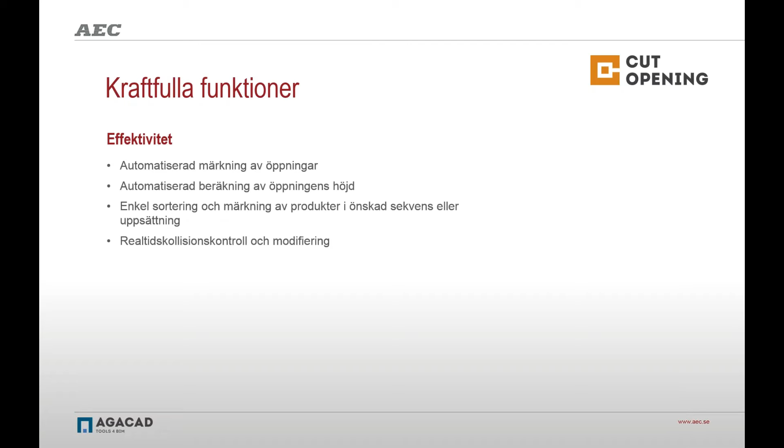Thank you, Roger. Thank you. I'm trying to make me a presenter. Could you see my screen? Yes, we can. Yes, very nice.

So hello, my name is Jokubas Vaishvila. I'm a BIM application engineer and MEP engineer here in AGACAD, and today we will speak about Cut Opening software for Revit. And first of all, I want to introduce Cut Opening a little bit.

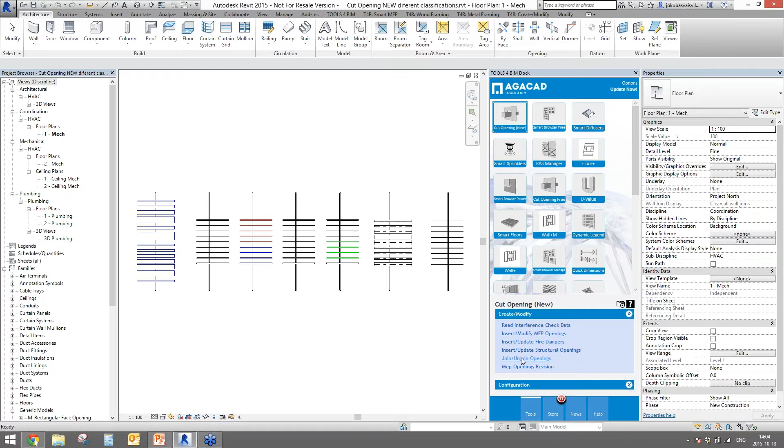So Cut Opening is a tool that can create openings all around MEP line-based elements, as Roger described just before. Our Cut Opening is placed in the Tools for BIM dock, and it has a lot of different features like insert openings, insert fire dampers, insert structural openings, and so on. So I will start from openings for different systems.

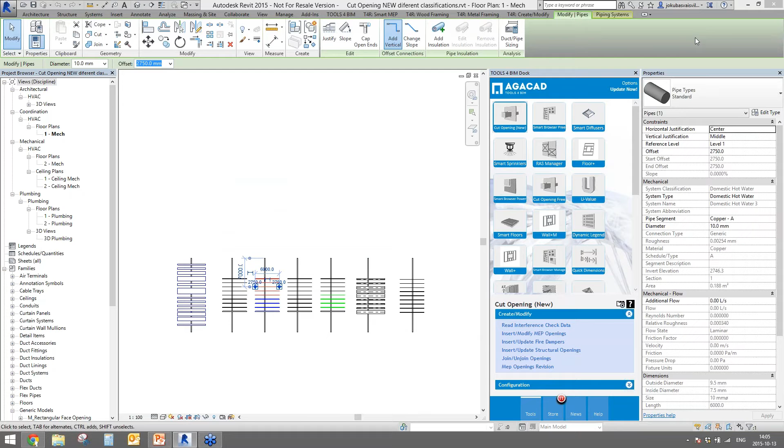I have different ducts here. I have different pipe types and pipe system classifications here, and I want to speak about how we should work with this in Revit. So at the very beginning, to start the work with Cut Opening, we have to use Autodesk Revit tools like interference check, and we have to run interference check between different categories.

So in my case, I have different categories for ducts, pipes, cable trays, and conduits over there. On one side I should use MEP objects like cable trays, conduits, ducts, and pipes, and on the other side I have to pick something structural. Our solution supports cable trays, conduits, ducts, and pipes, as well as walls, floors, ceilings, roofs, beams, and columns. So on the structural side you can choose those structural elements as I listed before.

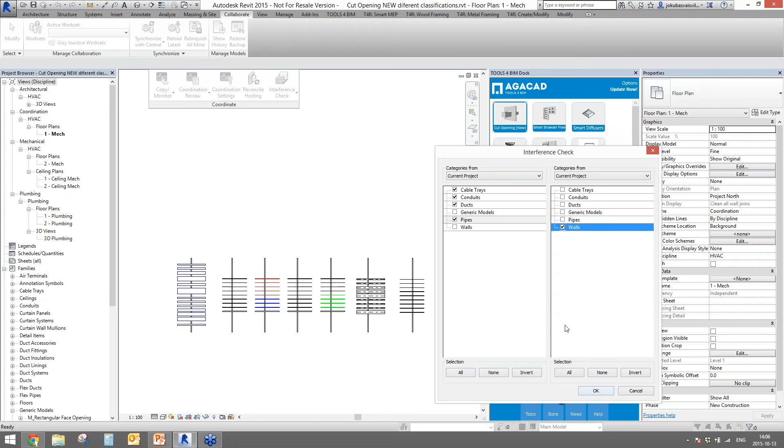And after you run this interference check and you have all the clashing points over there, you can export everything to an external HTML file by the name you wish, and I'm saving that. And the next step, what you should do, is to make your own configuration.

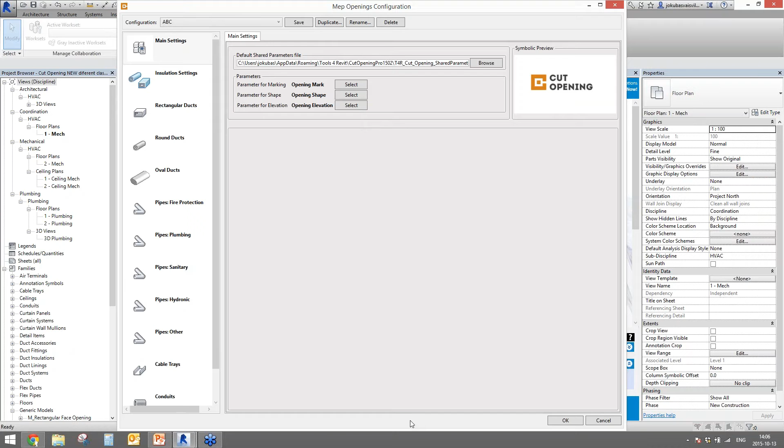So I will speak a little bit about the configurations inside of Cut Opening. So I'm clicking on MEP Openings Configurations, and I get the dialog with all needed configurations, as I told you before. So as you can see, for example, I will open pipes.

On the left side we have different systems and different types of MEP line-based elements like rectangular, round, and oval ducts, like fire protection, plumbing, sanitary, hydronic, or other pipes, and we have cable trays and conduits. So for each of these different system classifications or different types of elements, we can add different configurations for openings.

This is a new version of Cut Opening, so we have introduced a very nice feature that you can add different cut offsets, different additional top or additional bottom offsets for different ranges of pipes. For example, if you need to place the offset of 200 millimeters for pipes that are from 0 to 25, you can do that. If you need to do that for the pipe from 25 to 50, you can do that. You can write your own cut offset.

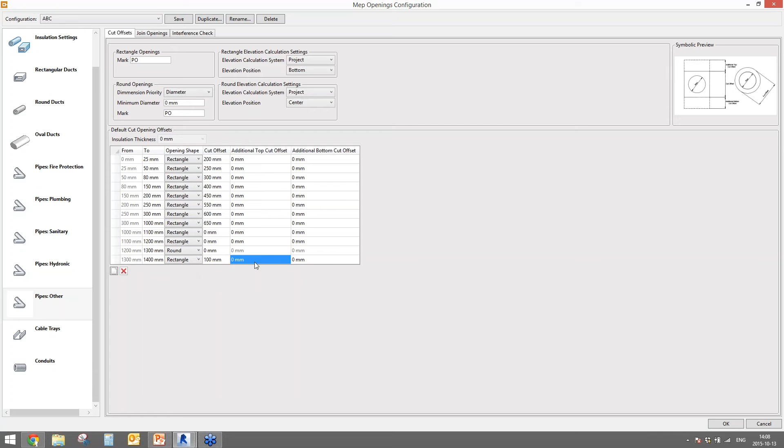Anytime you can create your own pipe types, pipe ranges from, for example, 1.3 to 1.4, and you can add your own cut offsets as well. You can change the opening shape, and you can add additional top or bottom cut offsets if it's needed. For example, that is common with the cable trays. When you need to lay the cables from the top side of the cable tray, you have to cut a bigger opening in such a case. So in this case we do not have such.

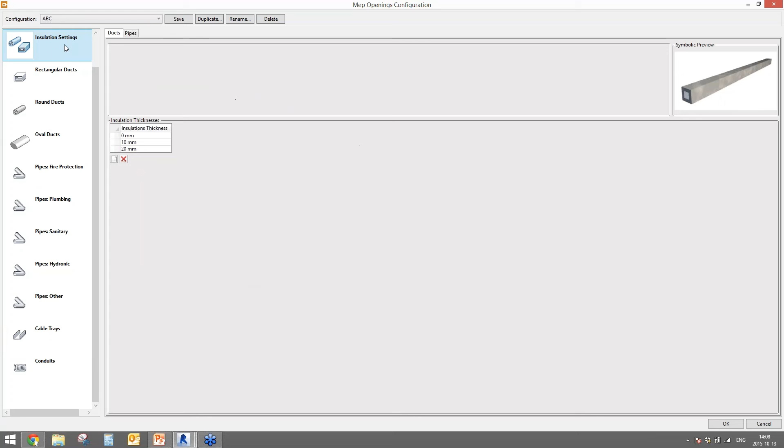As well, you can do these things for different insulations of ducts or of pipes. For example, if you have something like fire protection walls and you have to create bigger openings for such insulations, you can go and you can change that, and you can create your own specific new things inside of here.

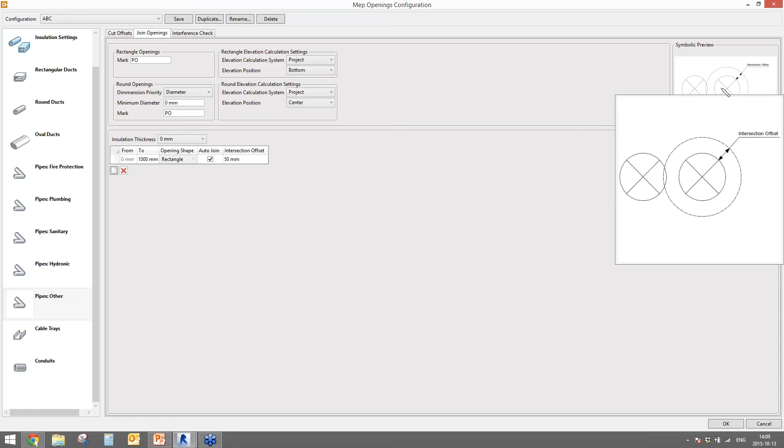As well, we have auto joining functionality that you can find here. So our solution could auto join the openings into one bigger opening if the distance is set to this one, and it will automatically create a rectangular opening. It doesn't matter if they were round or rectangular before. As well, you can add your own ranges here, as the example I showed to you before.

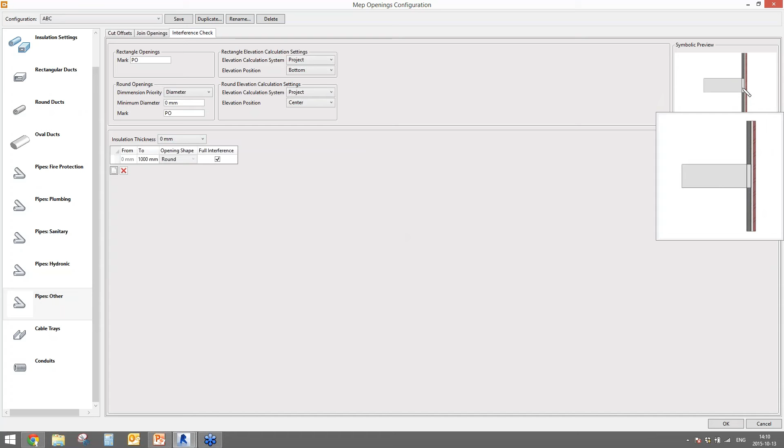And we have a very nice feature for ducts. Maybe it's best described with the ducts. When you have a wall-mounted diffuser, and your duct does not cross over the wall but just reaches the wall, like in this picture, we can cut the opening, or we can not cut that opening, so that depends on if we require full interference or if we do not.

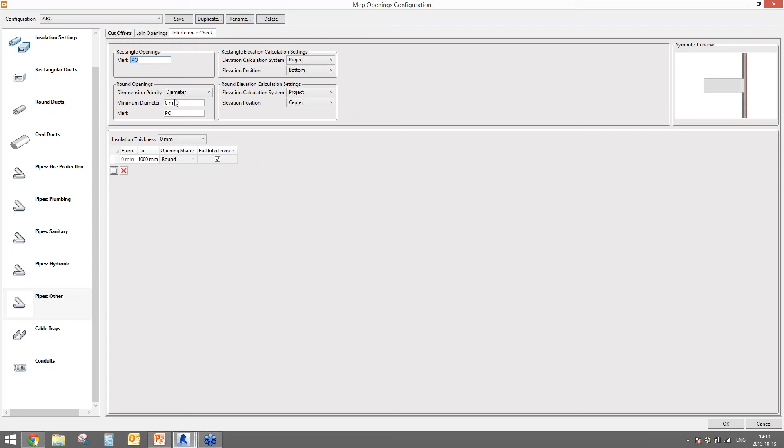So after you set all the configurations, you can set some marking things, like you can mark the rectangular opening, you can mark the round opening by your new marks. For example, in my case, if I have pipe other, I have PO, where P stands for pipe and O stands for other. If I have pipe hydronic, I have pipe and hydronic here.

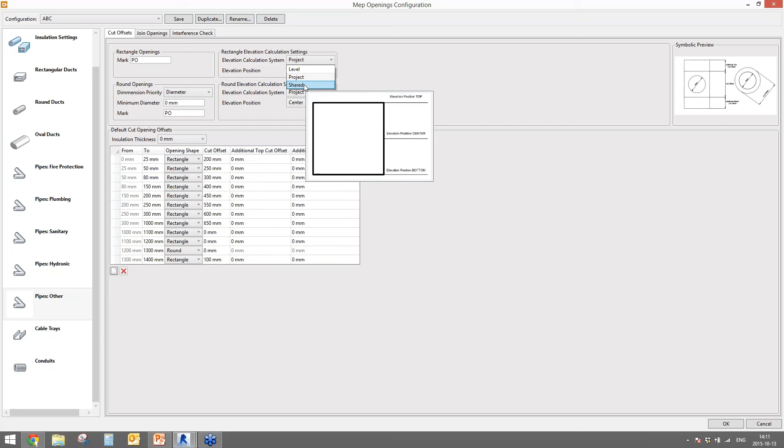As well, we can calculate the elevation of each of these openings by different systems of calculation. So we can calculate the elevation of our opening from the level that is above the opening. As well, we can calculate the opening elevation from the zero project point, or from the global 0 point, that stands for the shared elevation calculation system. As well, you can see that we have the descriptions everywhere. We can calculate the elevation from the bottom of the opening, from the center of the opening, or from the top.

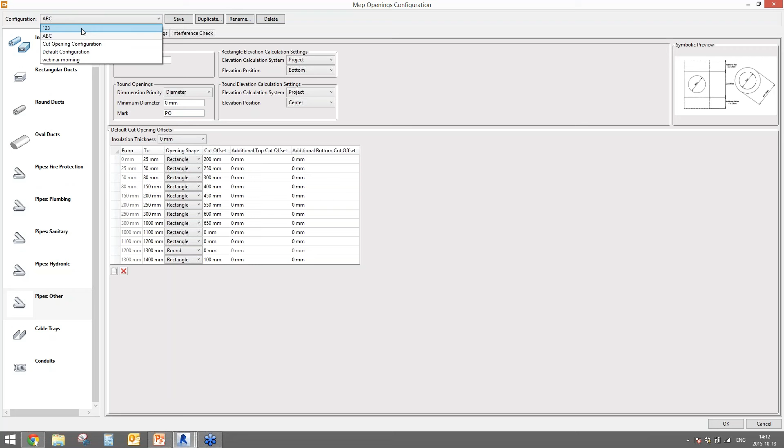So you have to do these steps once. You have to click, you have to write the markings, you have to define all the configurations here, and after this you can save everything as your new configurations, and you can share that in your company with your colleagues, and all your colleagues will have the same configuration file afterwards. So after everything is set, we have to click OK, and now we can go and work further. So as you remember, we ran the interference check before, and now I'm going to read that interference check data using Cut Opening software from Tools for BIM dot.

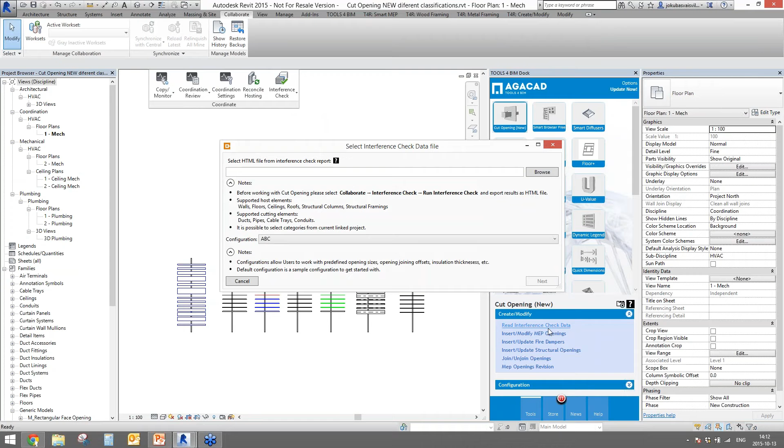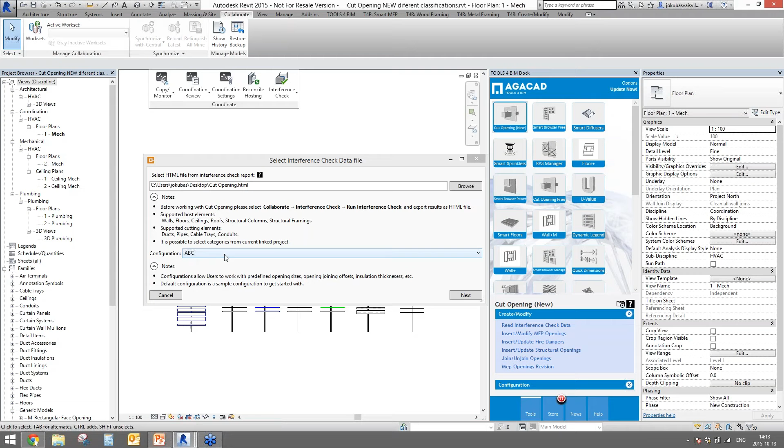So here I have a really nice dialog where I will browse for that HTML file as it's written here. I'm browsing it here, I'm finding that cut opening HTML file, and here I have to choose my configuration according to which I will place the openings to my project.

So as you can see, we do not have any misunderstandings right now, but if I change that to the default configurations, for example, you will see that we are missing some functionality, or we have some bad points inside of this clash report. So the solution is saying that we are missing opening configuration for conduit sizes that is 103 millimeters diameter. So I can add that.

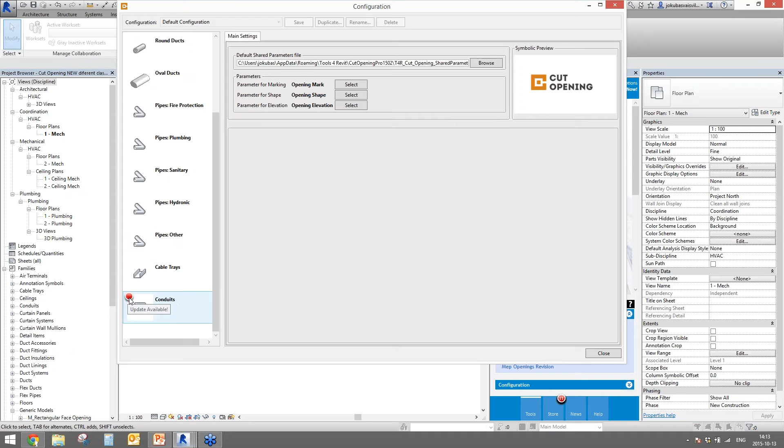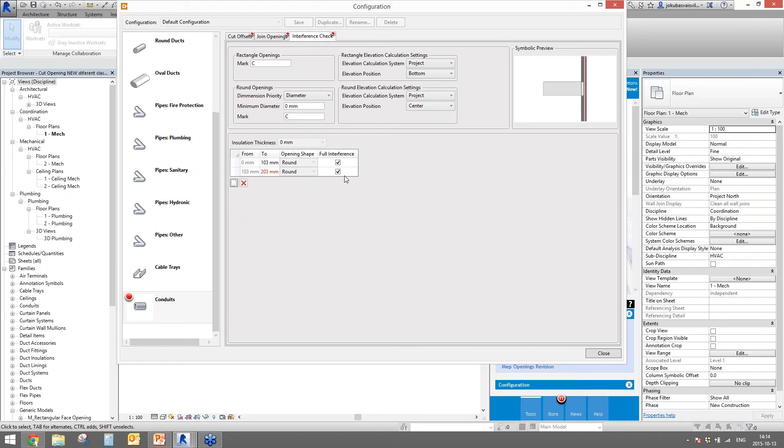And afterwards I can review the configuration, and you will see that our cut opening became a little bit smarter, so it has the intellect. If you follow the red bubbles, you will see that our cut opening found that we are missing such configuration, and we can add new configurations, new cut offsets, new opening shapes, additional top and bottom offsets, joining distances, and interference check requirements for such sizes.

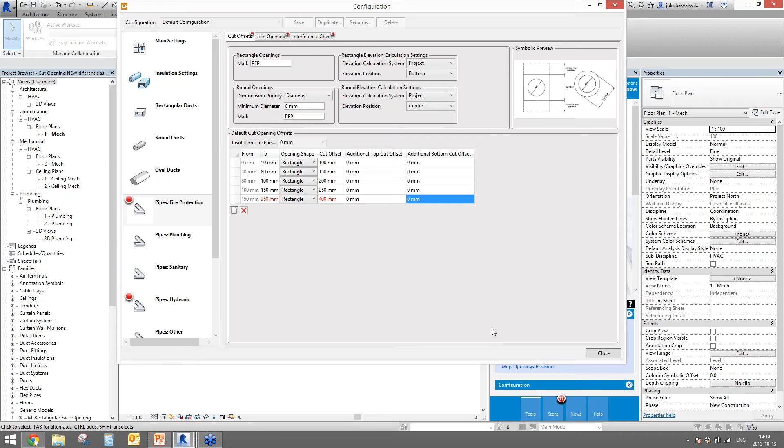So after this, everything will be written inside of that configuration. So I can add all my needed missing configurations, and I can review them again. And as you can see, we have fire protection, and we have added new ranges for that.

So after this I can go with two different scenarios. I have the scenario when I click next, and only not excluded elements will be processed. That means that these elements shown here by the IDs wouldn't be processed, so the openings wouldn't be inserted for these MEP line-based elements. But if I go with the skip button, all not excluded and excluded elements by configurations will be done. So let's try to do that by two methods. Firstly, I will go with next.

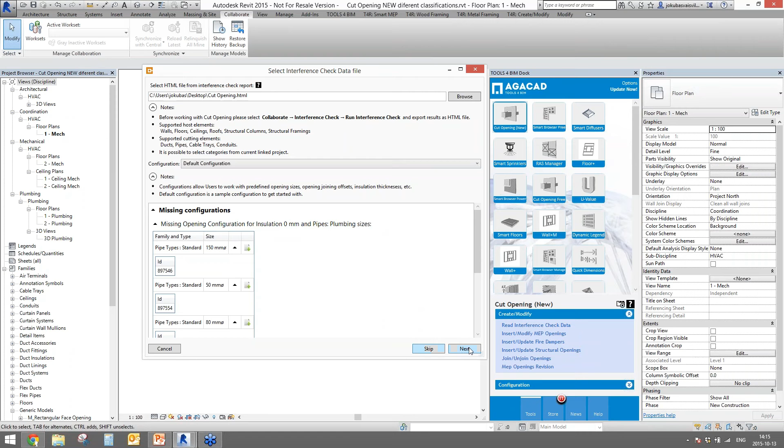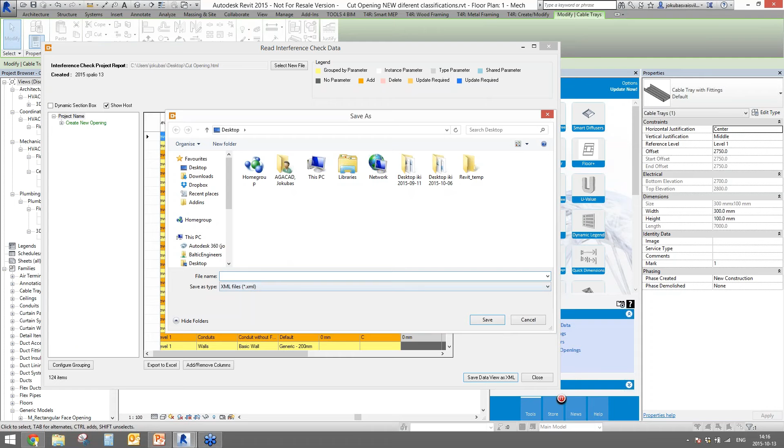And as you can see, we have a dialog where we have all the markings, we have insulation thicknesses, we have additional top bottom offsets, we have opening shapes, and so on. All the information is written inside here. If it's needed, we can use configure grouping to group our elements by our needed grouping types. And after this I have to save data as XML file, and I'm calling it XML next. I'm saving that.

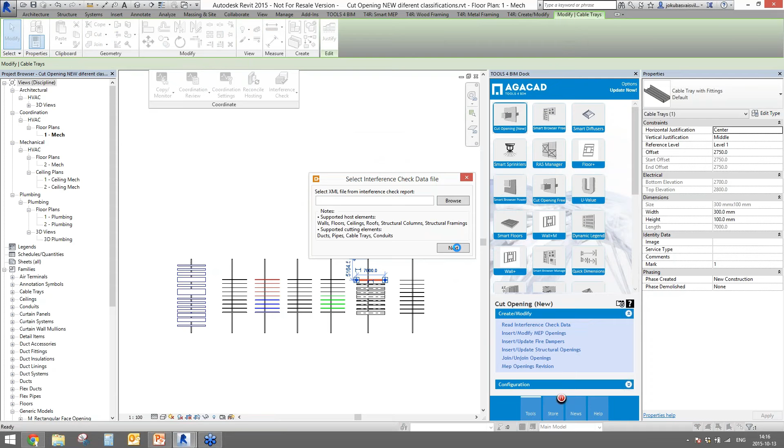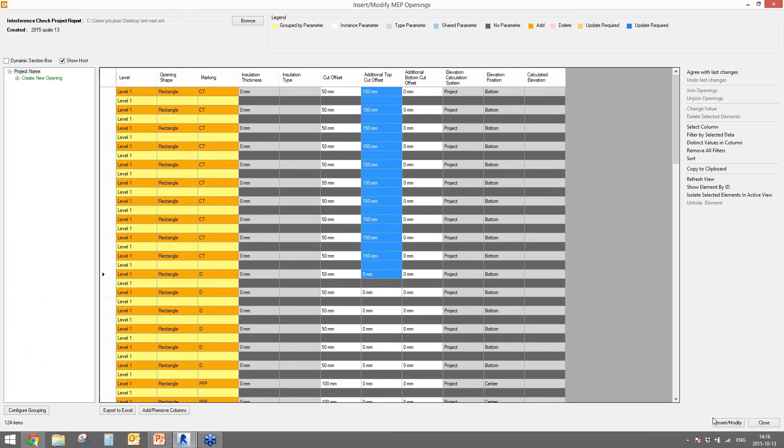Yes, and I'm going to insert openings by that XML next file. So I have a lot of openings with the same cut offsets, the same top and bottom offsets, and so on. So I can share that HTML file that I just saved with my colleague through email or something like that. It doesn't matter. And my colleague, for example, a structural engineer, could insert those openings into the model instead of me.

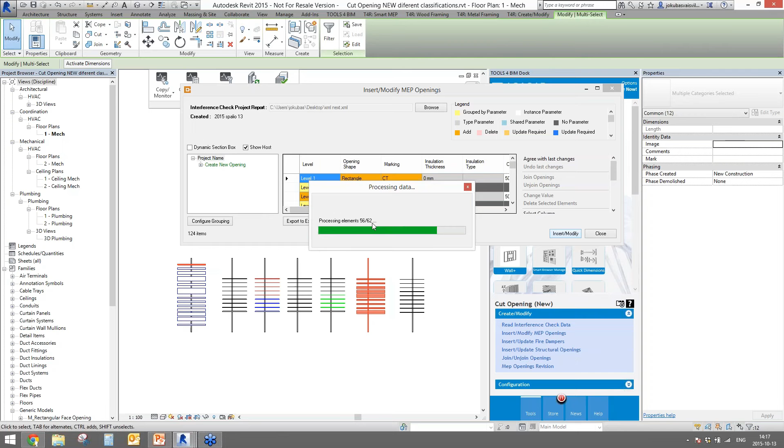So after he gets that information, he will know all the offsets and all the configurations that were set before. And I will try to insert openings, and you will see that 62 openings are inserting now. Let's go to the 3D view, and you will see that we have openings over there. But we do not have any openings for domestic cold water right now. And all these openings that are distributed have the information who inserted the opening, what the insertion configurations were, and what the insertion date was.

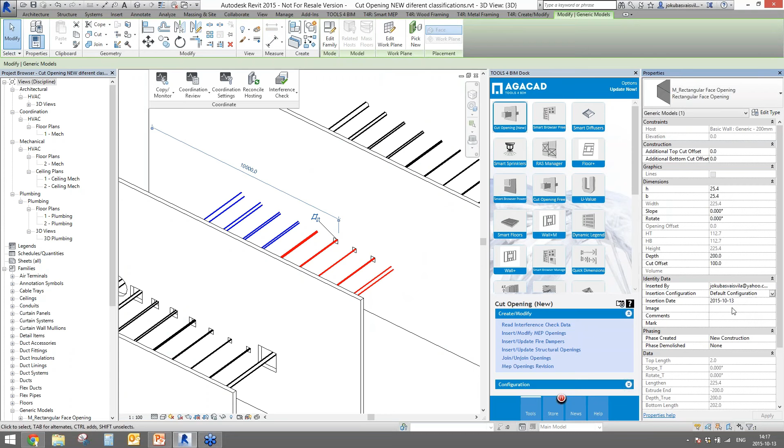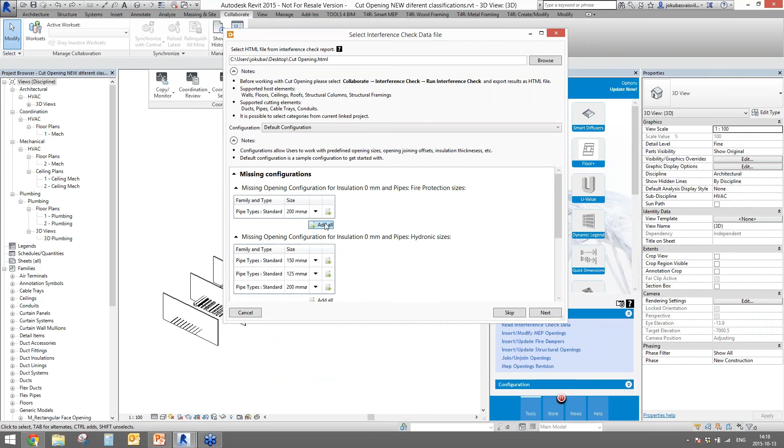And if I turn off and read again the interference check data from the same file, I will show you what will be done. I will add this one, this one, this one, and this is missing, and I will use the skip button, and I will save XML as XML skip. So it will insert openings for all MEP line-based elements.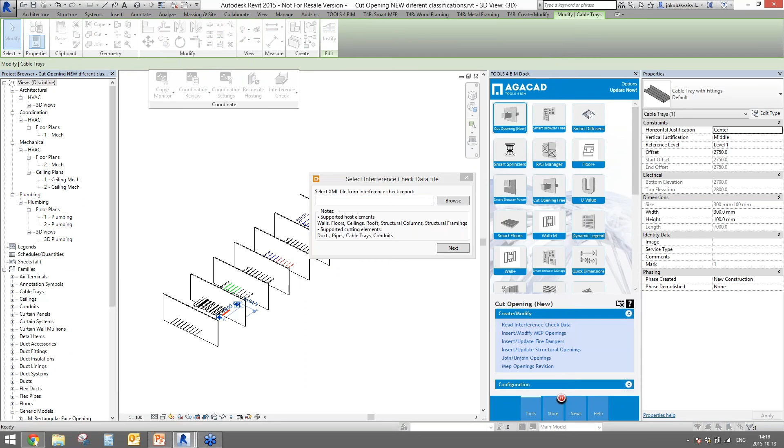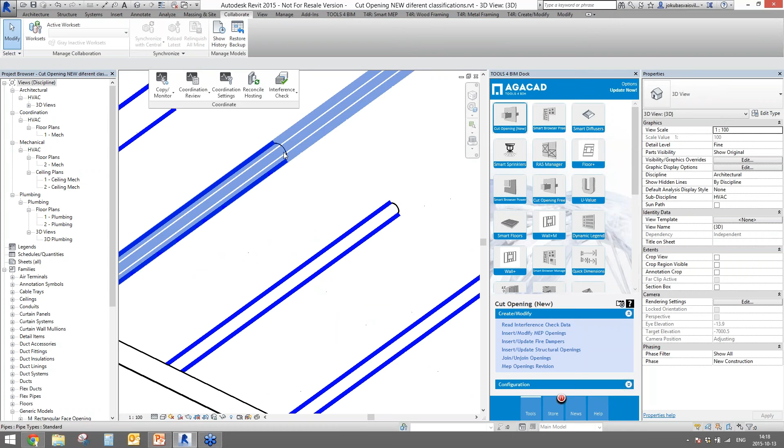So I'm inserting, I'm browsing the skip file, I'm clicking next, and now I'm inserting. So instead of 62 openings, we will insert 68. That means we are inserting more openings. And as you can see, those elements have no configurations, but they are inserted.

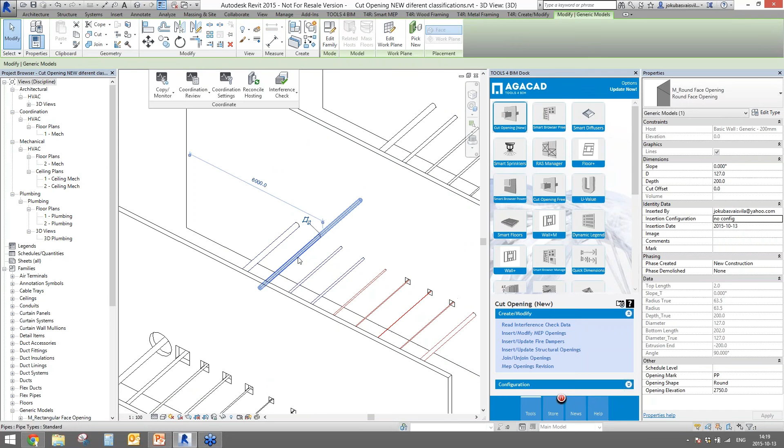So that's the difference between next and skip, and you can work with the configurations or without them if you need just opening shape and opening size dependent on the pipe or on the duct, and so on. So that is how the cut opening is working, and I just want to mention several things.

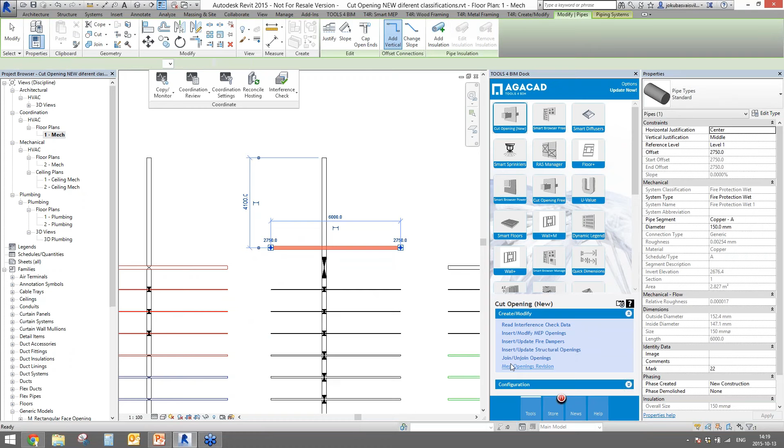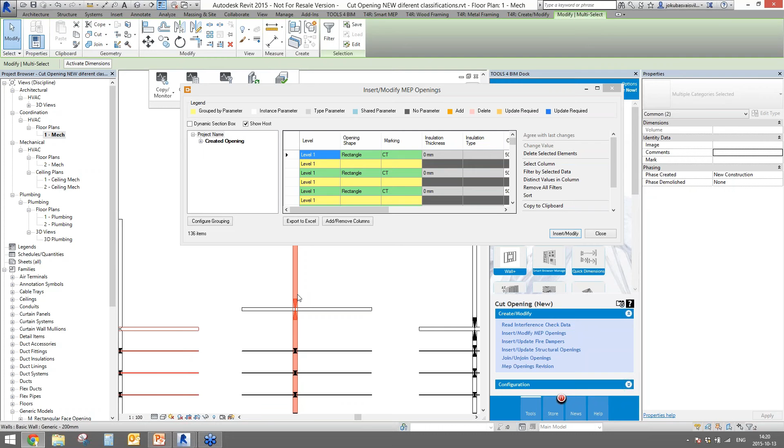If we move our elements, the cut opening will notice that, and if you go to Mep Openings Revision, you will see the change. You will see the changed position elements, and if I take those, you can see that the opening and the host were changed. I can modify that, and you can see that my opening pops back to the pipe or to the duct, it doesn't matter. Oh, you have to refresh this one. If the MEP object is moved, you will always know that you have to modify or update that.

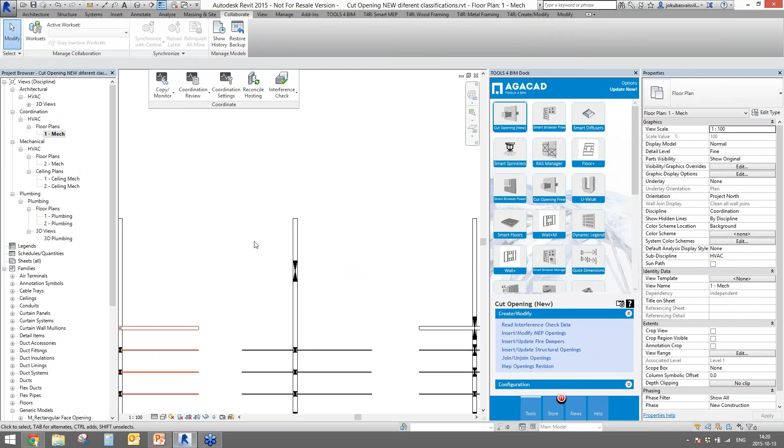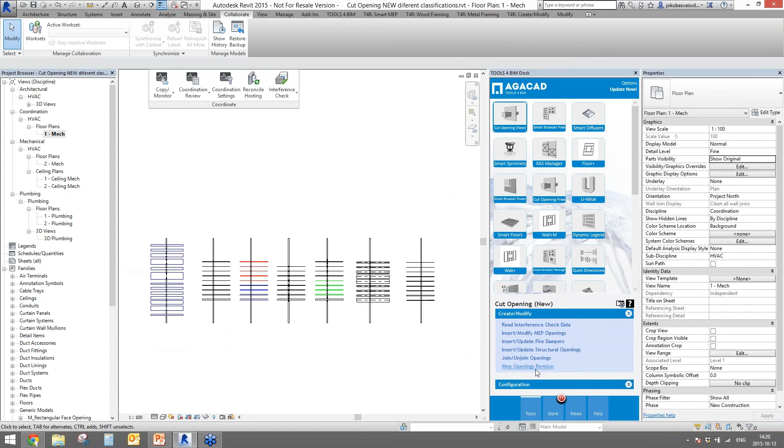If you delete an MEP object as well, you will get the same message that we have deleted elements, and we can modify that, and the opening will disappear from your project immediately. So if you make any changes to the model, you will always know that some changes have been made for those openings. As well, you can do something manually. For example, for this opening, you can add additional top offset. As you can see, the opening can still be modified by hand, and you can do whatever you want here.

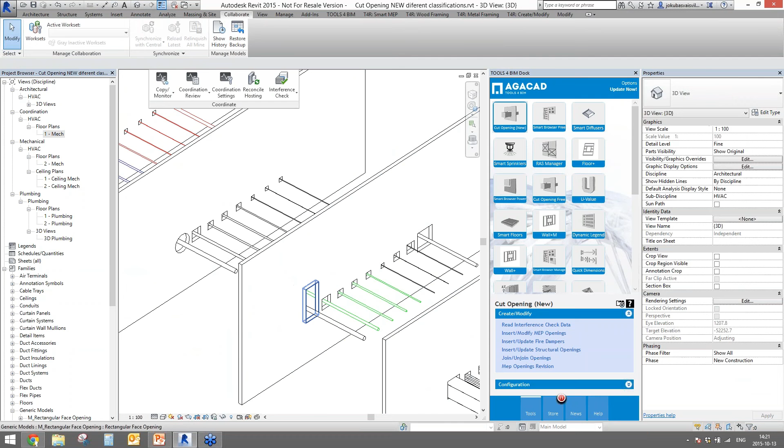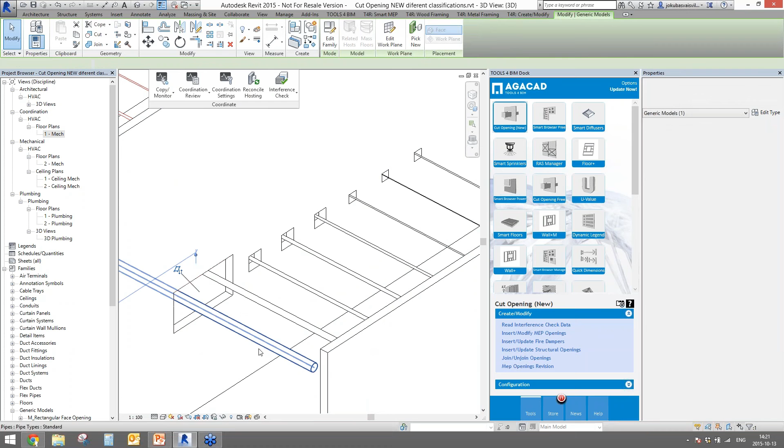As well, you can use our functionality to auto join the openings. And as you can see, they auto-join the openings. Or those two. Okay, let's try the round and rectangular one. Those two, I will try to join the openings, as you can see, and I can unjoin them if it's needed, and they will remain the same as they were before. So that is all for the openings, and I want to move further and speak a little bit about fire dampers.

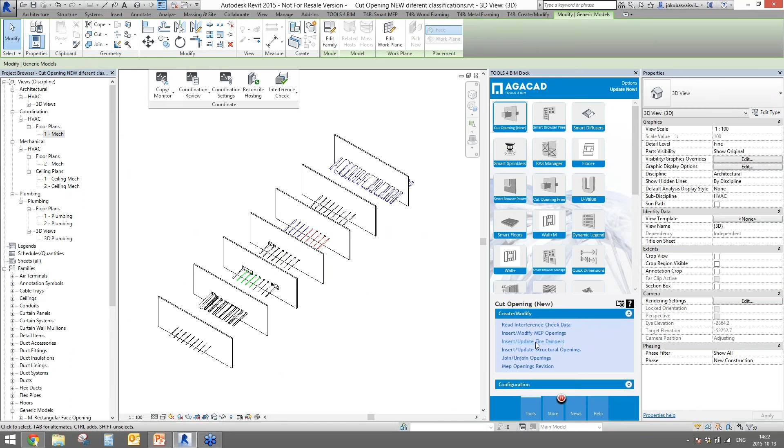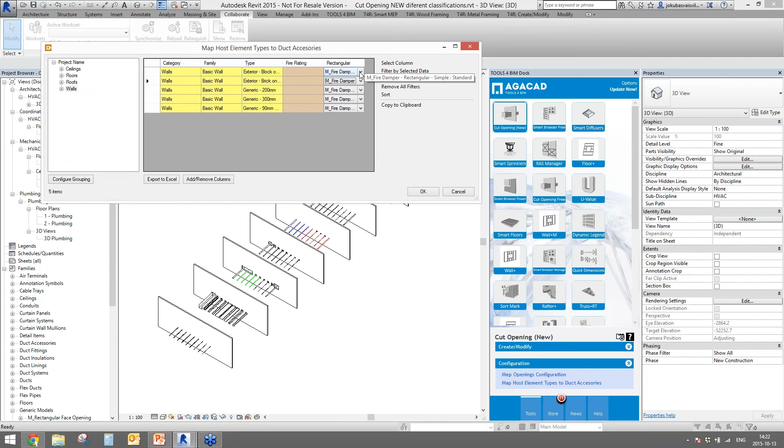So we have the possibility to insert or update fire dampers in the Revit model for ducts where they clash with walls, roofs, floors, or ceilings. So we can go to map openings, map host element type to the duct accessories, and as you can see, we have walls and types of those walls. If we write some fire rating inside the walls, we will find that over there, and we are able to choose from our families that stand for fire dampers here. And after we map everything, we can go back and insert or update fire dampers into our project.

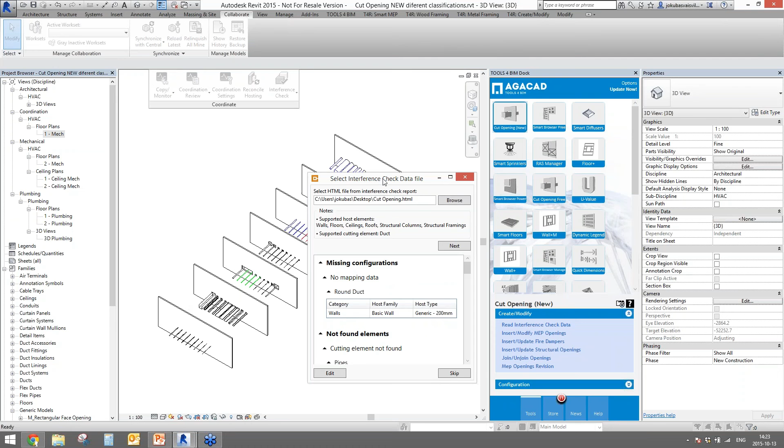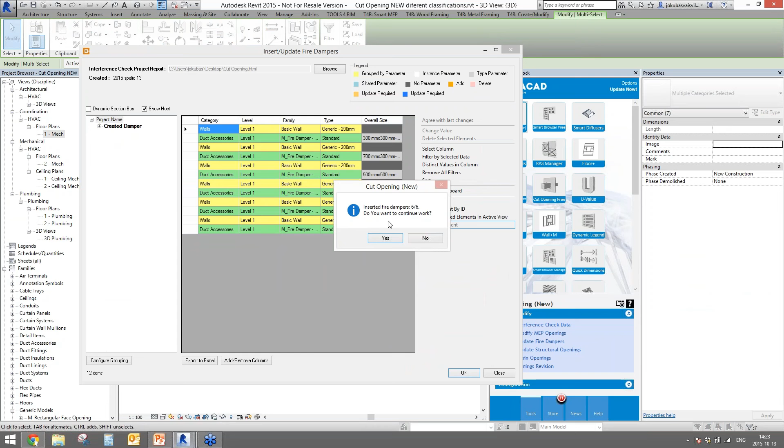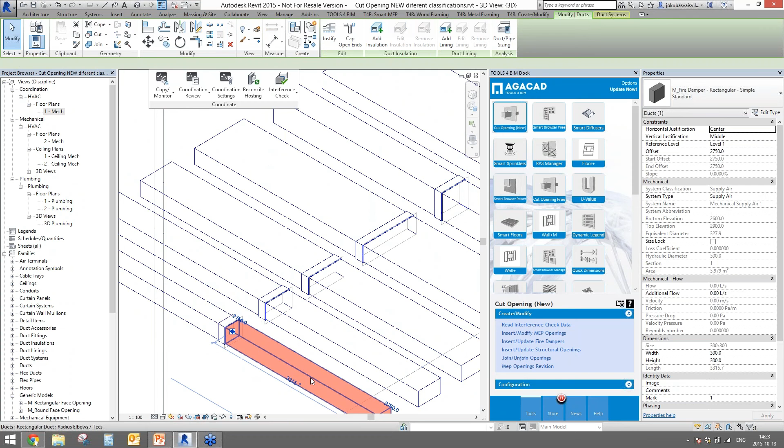So I will use the same HTML file. I will get a lot of notifications because I have pipes and walls and so on. So I will go with next, and I have only several ducts and one wall to proceed with the fire dampers. After I click OK, you will see that I have distributed elements. Let's change the discipline to mechanical, for example, and as you can see, we have distributed fire dampers in places where the duct clashes with the wall, and as well we can create the opening all around in such a case. So this is how insert fire dampers works.

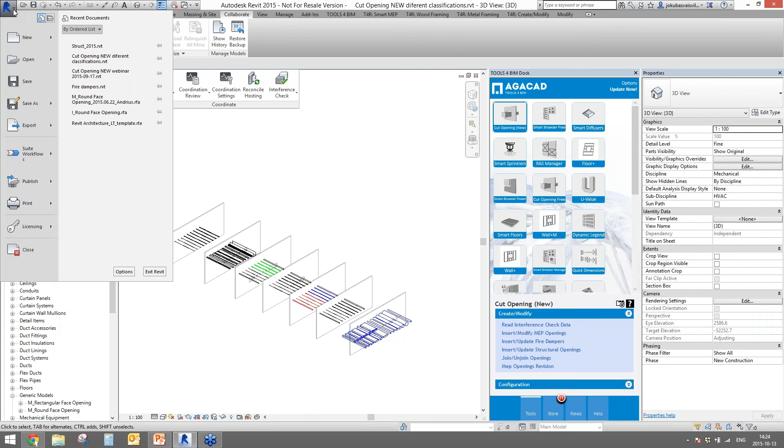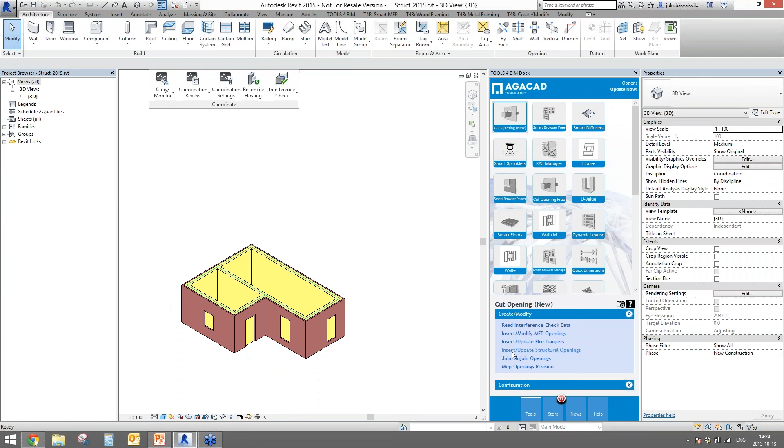As well, I want to speak a little bit about structural openings. We had several clients that had such problems in Revit. While you have the linked architectural model with openings for windows and doors, we can transfer the opening shape and geometry, the height and width, to the structural elements like basic generic walls. So we have the possibility to insert or update structural openings, and as you can see, it found all the openings.

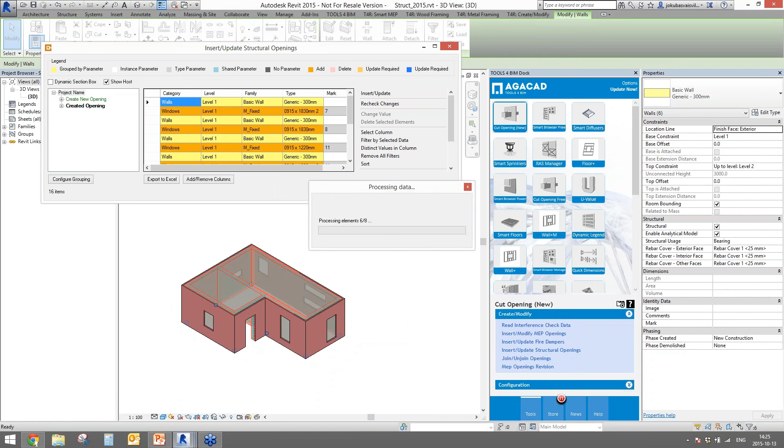And after I click OK, I will work firstly with the doors. It inserted an opening for a door. Yes, I want to continue work, and I will go with the windows. No, I don't want. As you can see, we have really nice openings in such a case where they have a linked architectural model, in the regular structural objects.

So if you want to try the cut opening solution, you can visit our web page, www.aga-cad.com, and you have to scroll a little bit down, and we have one shortcut to all tools that is named Tools 4 BIM Dock. And Tools 4 BIM Dock is this toolbar where you can find all the tools for cut opening from AGACAD, and you have to click on Revit 2016 download.

After the download, we have to click on it, run that. It is installing now. I am accepting that, so that will take just several seconds, I hope so, and we will get the right information. So here in the Tools 4 BIM Dock, we can find the store where all our tools are placed, so you can try all of them for 14 days freely.

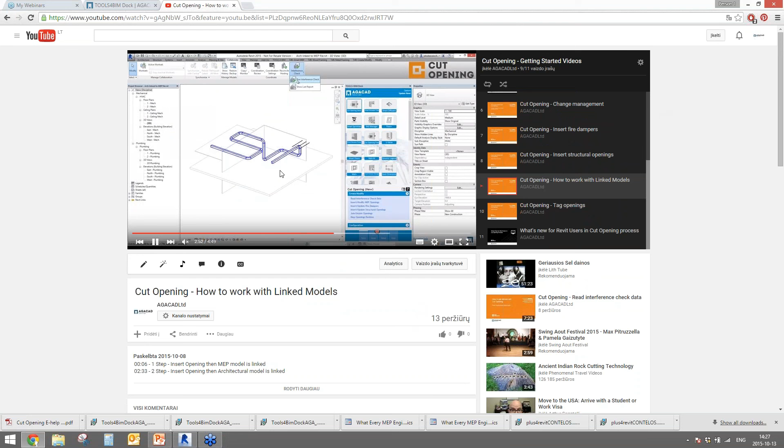As well, you can find all news over there, all tips and tricks for each of the tools, and so on. As well, if you go to the cut opening, you can find that we have e-help of the technical documentation. Just a second. As well, we have getting started video material. So if I click on it, you will see that we have a lot of video material, how to work with linked files, and so on. So you can work with the linked files as well, with cut openings as well, the IFC, and so on.

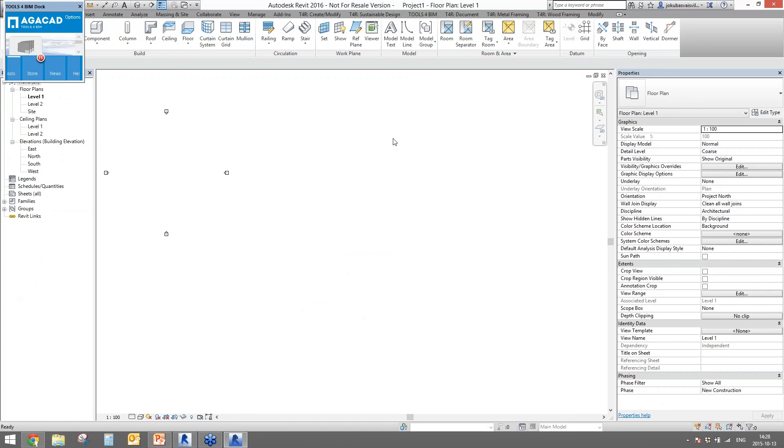So after we downloaded everything, we can go to Autodesk Revit 2016. Just a second. And you will see a new tab here in the toolbar that will be named Tools for BIM, I think so. Yeah, okay. You can see that we have something new over there, and I will place it somewhere here. I will do like this, and you have to go to the store, and you will see the cut opening new. So I will install that. We have to wait a little bit, and after this you will get the possibility to get the trial.

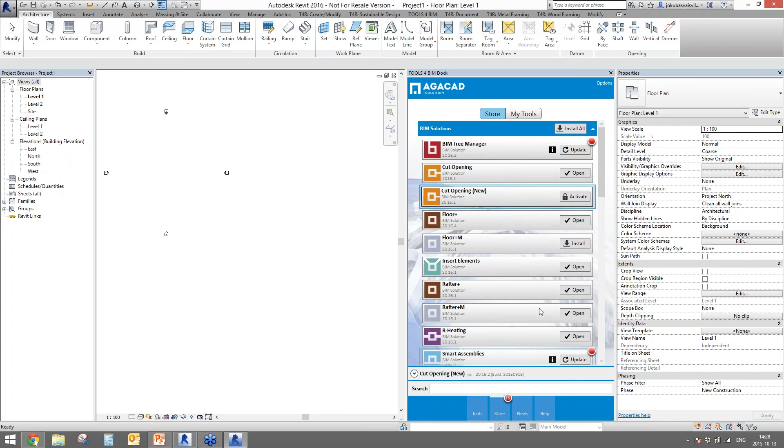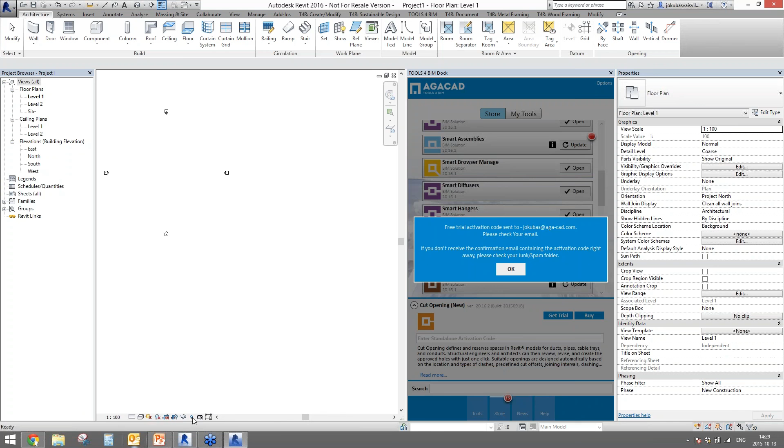So it was successfully installed, and you can activate that, or you can use the get a trial button, and you will fill in all these fields and get a free trial for that, and that will pop into your email box, and you will write it over there, and let's go for it. You will be able to work with the cut opening solution, and do not forget that we have very nice video material as well as a text file where all the possibilities of the cut opening are written.